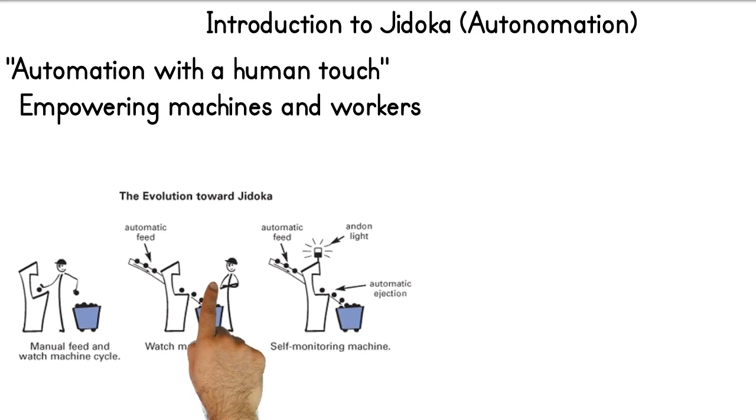Jidoka, also known as autonomation, is a key concept in lean manufacturing and the Toyota Production System (TPS). The term Jidoka translates to automation with a human touch and refers to the practice of empowering machines and workers to detect problems in real time, stop the production process, and immediately address issues. By integrating Jidoka, businesses can improve quality, reduce waste, and create a more efficient and reliable production system.

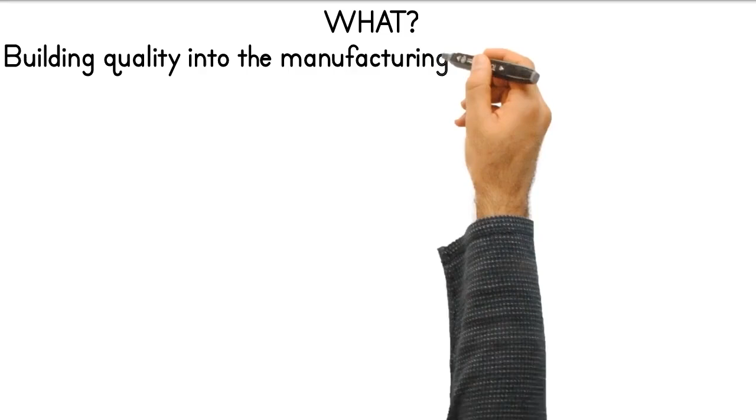What is Jidoka, autonomation? Definition: Jidoka is the practice of building quality into the manufacturing process by allowing machines and workers to detect abnormalities or defects autonomously. When a defect is detected, production is stopped automatically, which allows immediate action to be taken to resolve the issue. The goal is to prevent the production of defective products, reduce waste, and ensure that problems are addressed promptly before they escalate.

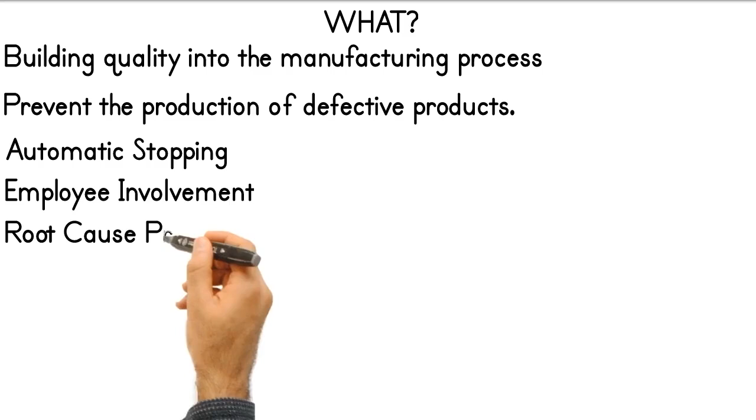Key components: automatic stopping. Machines or systems automatically stop when a problem occurs, e.g., defective parts or machinery failure. Employee involvement. Workers are empowered to stop production lines and make decisions to fix problems. Root cause problem solving. After an issue is identified, the root cause is analyzed, and corrective actions are implemented to prevent recurrence.

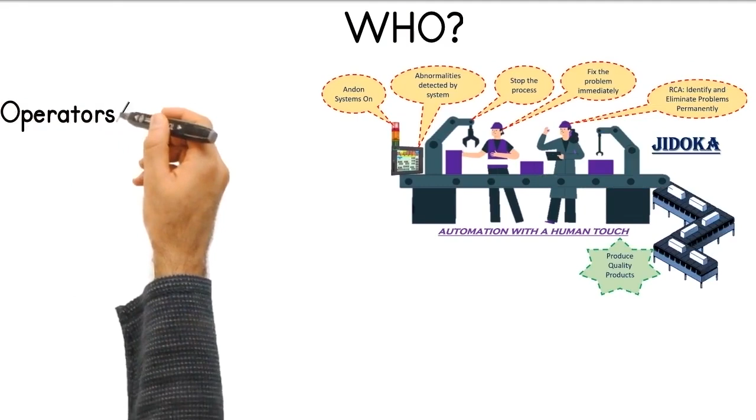Who is involved in Jidoka? Jidoka involves several groups within an organization, all working together to ensure that quality is built into the production process. Operators, workers are responsible for identifying and addressing problems. They are the first line of defense when an issue occurs, and they can stop the production line to investigate and solve problems. When equipment failures occur, maintenance staff is called upon to repair or maintain the machines.

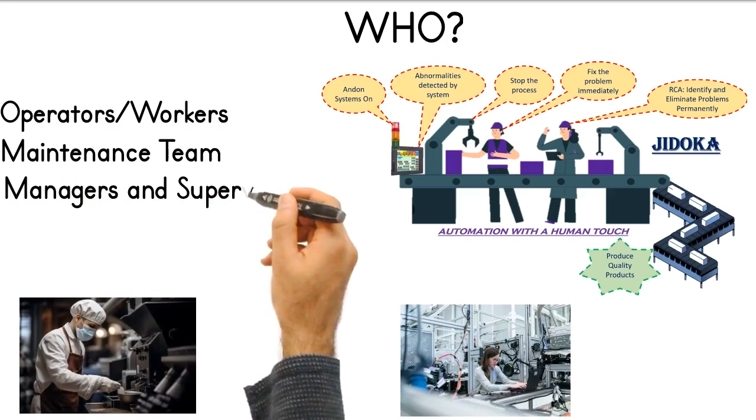Managers and supervisors support the implementation of Jidoka by ensuring that workers are empowered to stop the line and that there are systems in place to address issues effectively. Engineers design the machinery and systems with built-in detection mechanisms to detect defects and ensure seamless operation. Quality control teams monitor processes and work with operators to identify areas where defects might occur and help implement solutions.

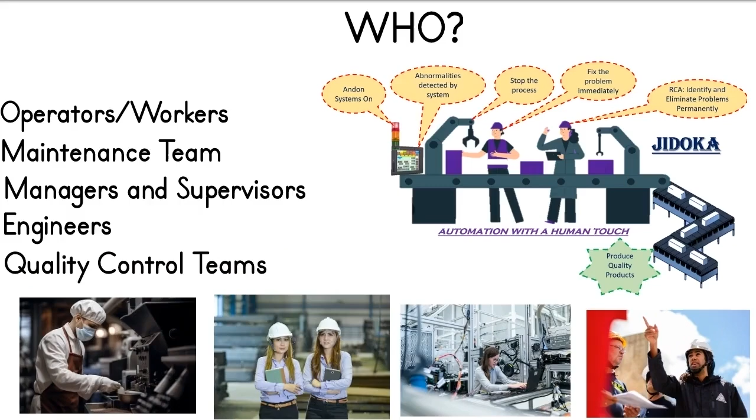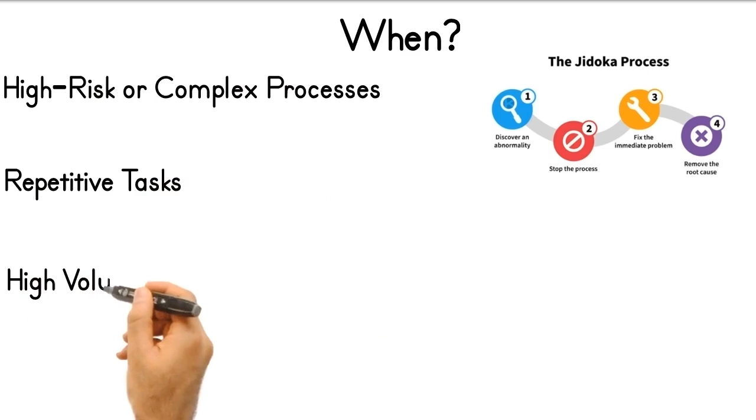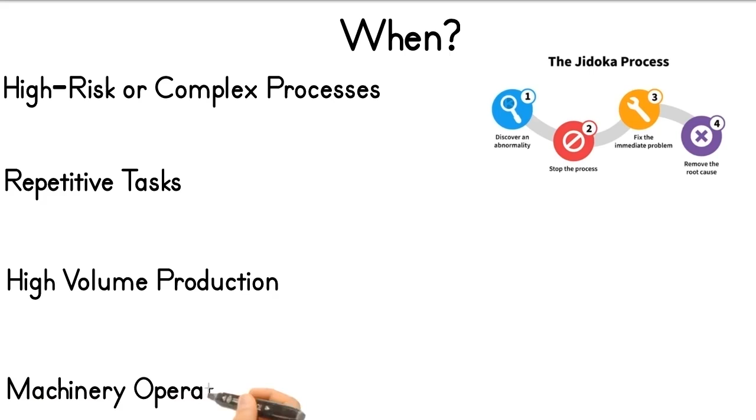When is Jidoka used? Jidoka is applied throughout the manufacturing process, especially when the following conditions are present: high-risk or complex processes. In situations where product quality is difficult to maintain, Jidoka ensures that any deviation is quickly detected and addressed. Repetitive tasks. In repetitive processes where issues might go unnoticed until the end of production, Jidoka helps to catch errors early. High-volume production. In high-volume manufacturing, the risk of defects is higher. Jidoka helps minimize this risk by ensuring quick responses to problems.

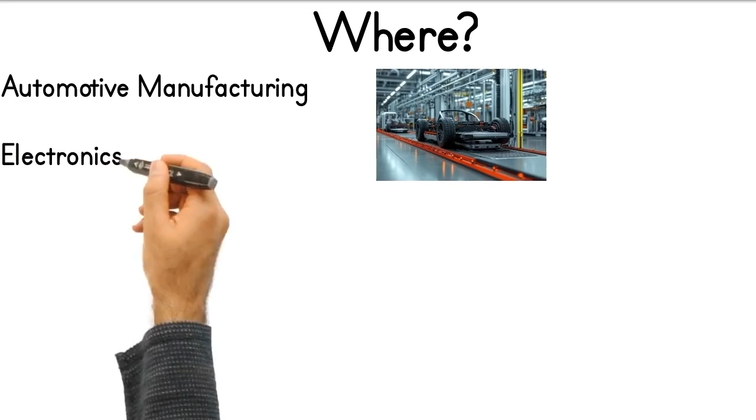Machinery operations. When machines are part of the production process, Jidoka is used to stop the machine automatically when an issue is detected, preventing defective items from being produced. Where is Jidoka applied? Jidoka is commonly used in manufacturing environments that prioritize quality and efficiency. Its applications can be found in various industries, such as automotive manufacturing. Jidoka was famously introduced in Toyota's production lines to improve the quality and efficiency of automobile assembly.

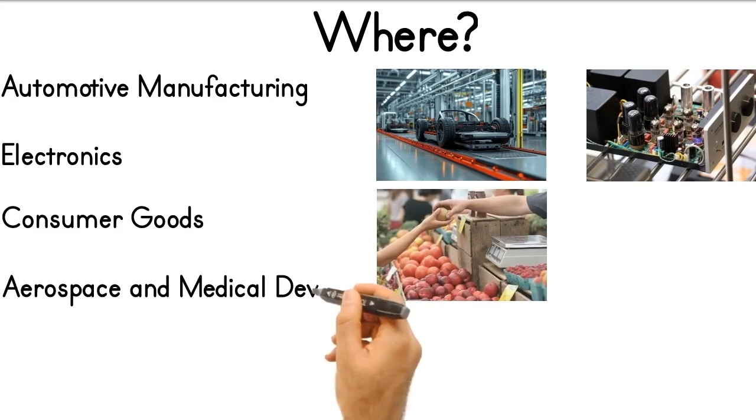Electronics. In the production of electronics, where even small defects can lead to significant issues, Jidoka is used to detect problems early. Consumer goods. Jidoka is applied in factories that produce consumer goods where consistent quality is crucial. Aerospace and medical devices. In highly regulated industries, Jidoka ensures that quality is maintained throughout the production process. Textiles and apparel. In textile manufacturing, Jidoka helps maintain high-quality standards in fabric production.

Why is Jidoka important? Jidoka plays a vital role in improving manufacturing efficiency, quality, and problem-solving in the following ways. By automatically stopping the production process when a defect is detected, Jidoka prevents defective products from continuing down the line, improving overall product quality. With Jidoka, resources such as materials, time, and labor are not wasted on producing faulty products. The ability to stop production at the source prevents the creation of unnecessary waste.

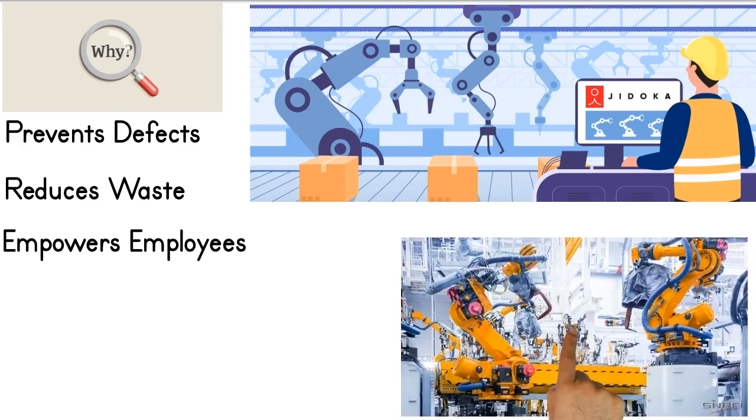Jidoka encourages workers to take ownership of the process. They are empowered to stop the production line, investigate the issue, and implement solutions. By addressing problems as they arise and analyzing their root causes, Jidoka contributes to a culture of continuous improvement and learning. With Jidoka in place, production lines operate with fewer disruptions, as problems are identified and solved quickly, reducing downtime and ensuring smooth operations.

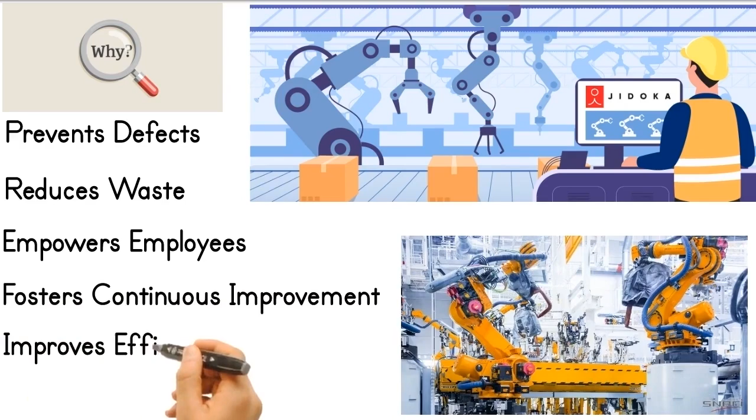How is Jidoka implemented? Implementing Jidoka requires a combination of technological solutions, employee involvement, and continuous improvement efforts.

Machines and systems are equipped with sensors and devices that can detect abnormal conditions, such as defects or malfunctions. When these abnormalities are detected, the machine or production line stops automatically. 2. Workers are trained and encouraged to stop the production line whenever they notice an issue. This is done with the understanding that stopping the process is necessary for ensuring quality.

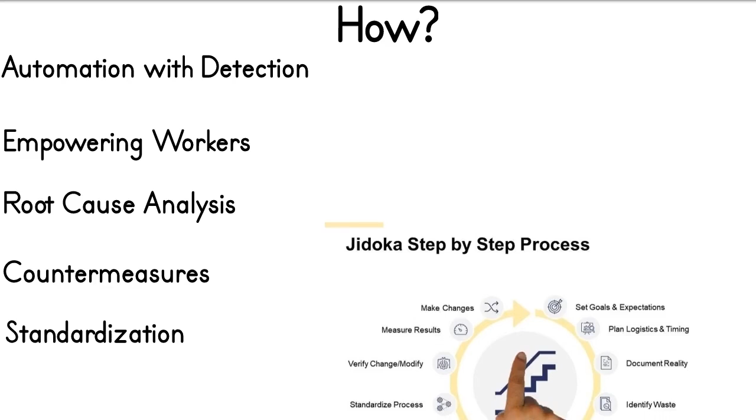3. After stopping production, the root cause of the problem is investigated. 4. Once the root cause is identified, corrective actions are implemented to resolve the issue and prevent it from recurring. 5. Successful countermeasures are standardized across the production system to ensure consistent results. 6. The effectiveness of the countermeasures is continuously monitored, and adjustments are made as necessary.

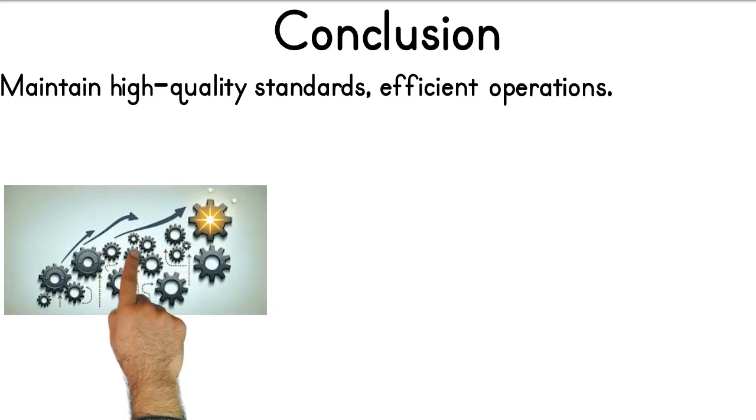In conclusion, Jidoka, or autonomation, is a powerful principle that helps organizations maintain high-quality standards and efficient operations. By integrating automated problem detection and empowering workers to address issues at the source, Jidoka ensures that defects are identified and resolved quickly, minimizing waste and improving overall productivity.

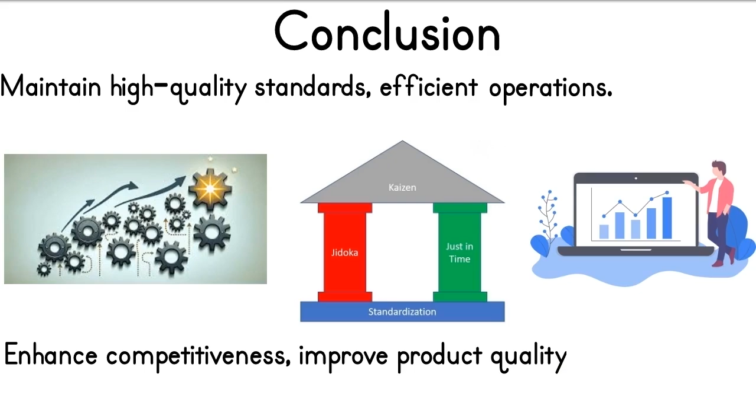The use of Jidoka leads to more reliable and consistent manufacturing processes, fostering a culture of continuous improvement and operational excellence. By implementing Jidoka, companies can enhance their competitiveness, improve product quality, and create a more engaged workforce.

This quiz is designed to assess your current commitment and readiness to learn about Jidoka, autonomation, a key concept in lean manufacturing. Your answers will help you gauge how familiar you are with Jidoka and how dedicated you are to mastering its principles for improving quality and efficiency in operations. Be honest with your answers to get a clearer picture of your commitment.

1. How familiar are you with the concept of Jidoka, autonomation? A. I have never heard of Jidoka before. B. I've heard the term but don't fully understand what it entails. C. I have a basic understanding of Jidoka but haven't applied it in my work. D. I'm familiar with Jidoka and have seen it in action or used it myself.

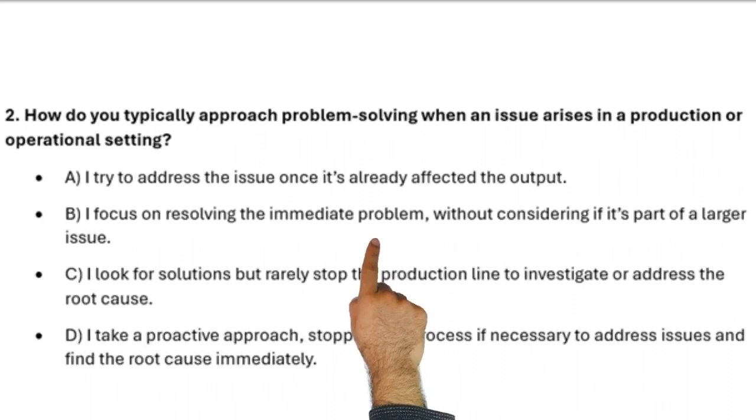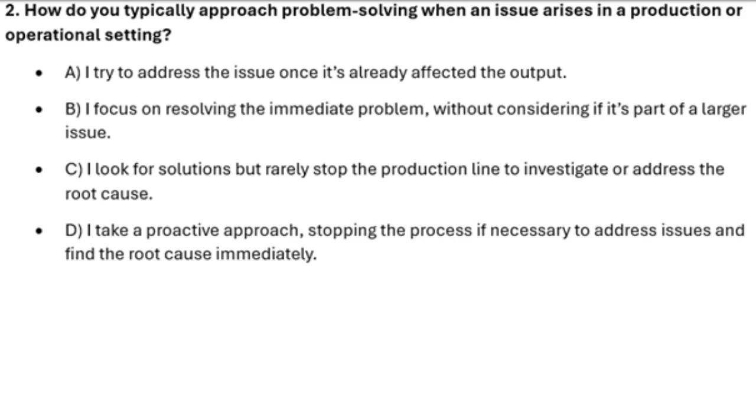2. How do you typically approach problem solving when an issue arises in a production or operational setting? A. I try to address the issue once it's already affected the output. B. I focus on resolving the immediate problem, without considering if it's part of a larger issue. C. I look for solutions but rarely stop the production line to investigate or address the root cause. D. I take a proactive approach, stopping the process if necessary to address issues and find the root cause immediately.

3. How comfortable are you with the idea of stopping the production line to address a defect or abnormality? A. I find it uncomfortable and would prefer to keep production running even if a minor issue arises. B. I'm okay with stopping production for critical issues, but I'm hesitant about smaller problems. C. I understand the importance of stopping production when necessary, but I haven't actively done so myself. D. I fully embrace stopping production when needed, understanding that it prevents larger problems and improves overall quality.

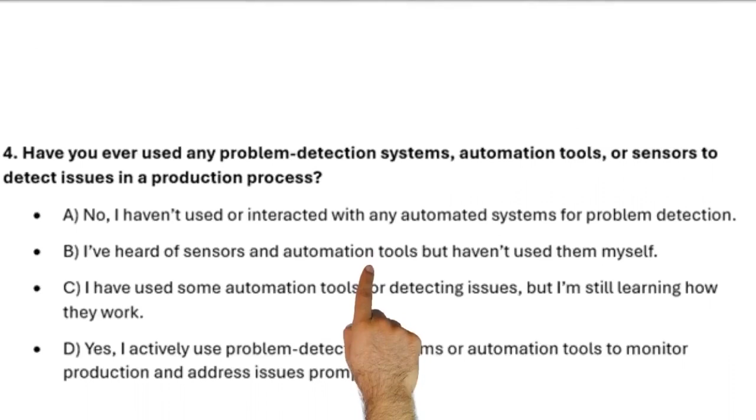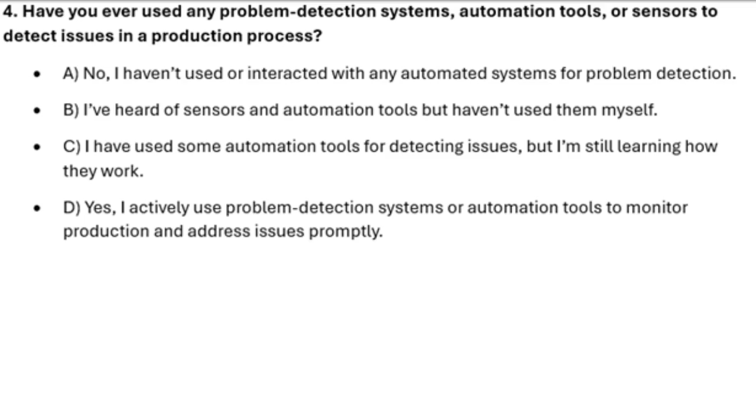4. Have you ever used any problem detection systems, automation tools, or sensors to detect issues in a production process? A. No, I haven't used or interacted with any automated systems for problem detection. B. I've heard of sensors and automation tools but haven't used them myself. C. I have used some automation tools for detecting issues, but I'm still learning how they work. D. Yes, I actively use problem detection systems or automation tools to monitor production and address issues promptly.

5. How important do you think it is to stop production immediately when an issue is identified, even if it means temporarily halting output? A. I think it's more important to keep production moving and deal with issues later if needed. B. I understand the importance but would prefer to address issues without halting production. C. I believe stopping production is important, but I'm not always sure when to act. D. I believe stopping production is crucial to ensure quality and prevent defects from spreading, and I'm committed to addressing problems immediately.

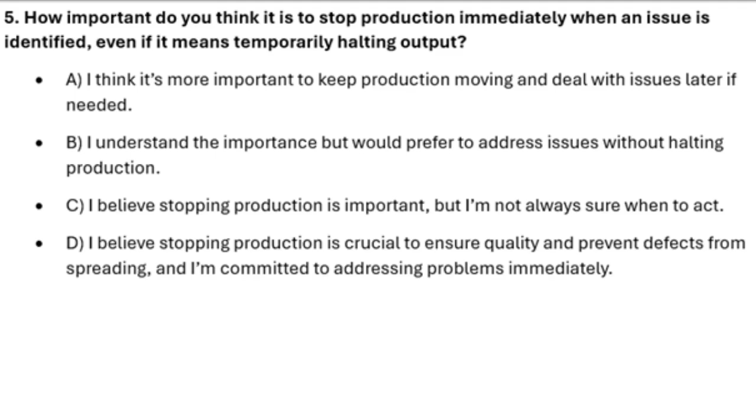6. How willing are you to learn more about Jidoka and implement its principles in your work or processes? A. I'm not sure if learning about Jidoka is necessary for me. B. I'm curious about Jidoka but haven't committed to learning more just yet. C. I am interested in learning about Jidoka and its applications, and I'm open to exploring it further. D. I am highly committed to learning about Jidoka and applying its principles to improve my work and processes.

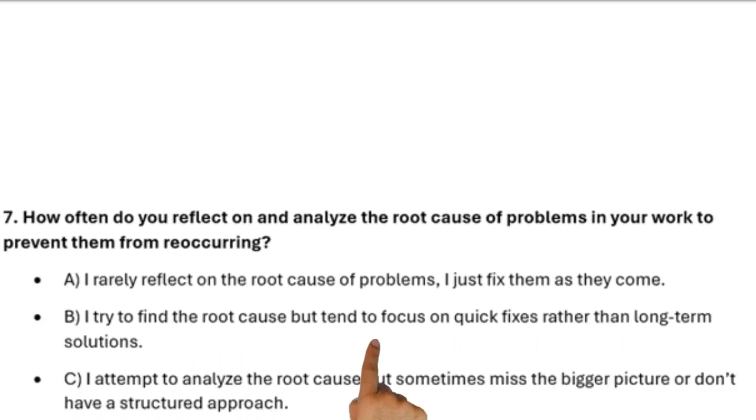7. How often do you reflect on and analyze the root cause of problems in your work to prevent them from reoccurring? A. I rarely reflect on the root cause of problems, I just fix them as they come. B. I try to find the root cause but tend to focus on quick fixes rather than long-term solutions. C. I attempt to analyze the root cause but sometimes miss the bigger picture or don't have a structured approach. D. I always focus on root cause analysis and strive to implement sustainable solutions to prevent issues from recurring.

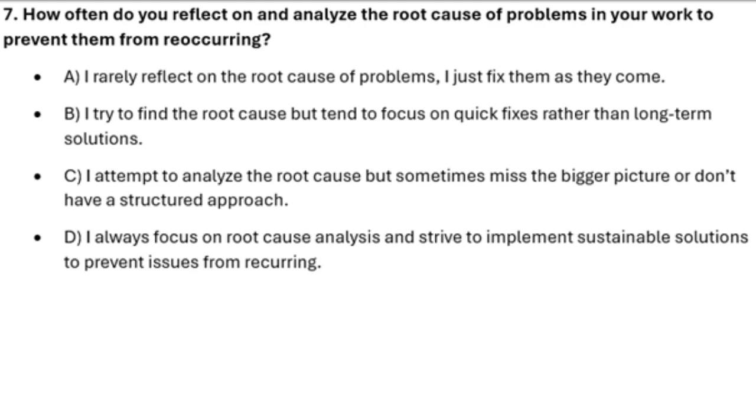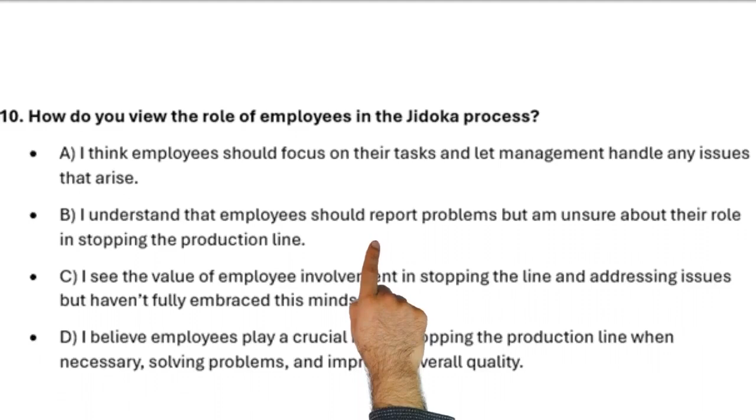10. How do you view the role of employees in the Jidoka process? A. I think employees should focus on their tasks and let management handle any issues that arise. B. I understand that employees should report problems but am unsure about their role in stopping the production line. C. I see the value of employee involvement in stopping the line and addressing issues but haven't fully embraced this mindset. D. I believe employees play a crucial role in stopping the production line when necessary, solving problems, and improving overall quality.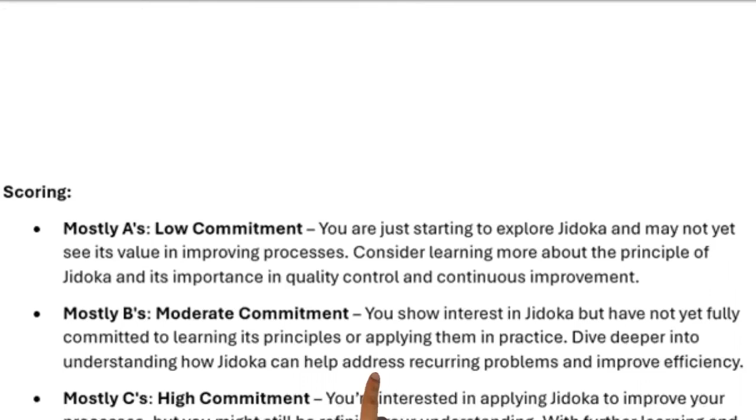Scoring guide. Mostly A's: low commitment. You are just starting to explore Jidoka and may not yet see its value in improving processes. Consider learning more about the principle of Jidoka. Mostly B's: moderate commitment. You show interest in Jidoka but have not yet fully committed to learning its principles or applying them in practice. Mostly C's: high commitment. You're interested in applying Jidoka to improve your processes, but you might still be refining your understanding. With further learning and practice, you can fully implement Jidoka and enhance your problem-solving abilities.

Mostly D's: very high commitment. You are highly committed to learning and implementing Jidoka. You understand its value and are actively working to incorporate it into your work or operations. Continue refining your skills and seek out opportunities to apply Jidoka principles in new areas.

Next steps. By completing this quiz, you've gained insight into your current commitment level to learning about Jidoka. Based on your results, consider setting a goal to explore it in more depth. Whether you're new to it or have experience with it, identifying areas for improvement can help you better contribute to process improvement and organizational success.